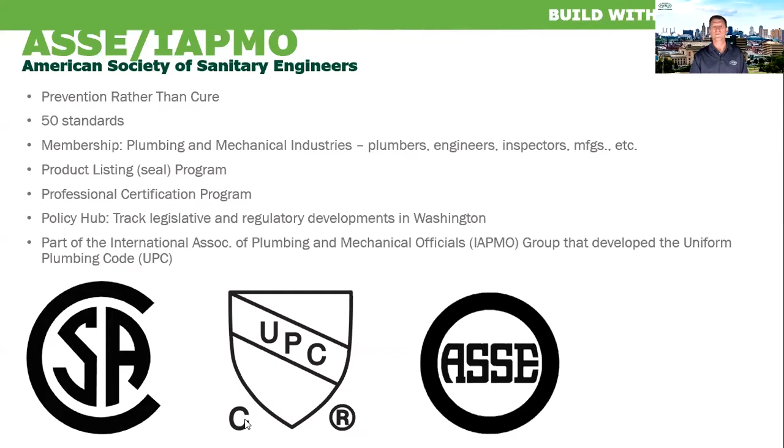Also on this slide, you can see the CSA logo. At Prier, we do not work directly with CSA. We could, but both IAPMO and ASSE have some avenues. If we want to sell into Canada, which we do, we just work through those organizations, and they can help us get the Canadian listing. They work with the CSA group. That's what the little C is next to the UPC shield there. That's not a copyright symbol. That little C means Canada. ASSE has a similar little C that they can put on their mark. At Prier, we've just chosen to work with the IAPMO group on the Canadian listing.

So here's the 4 main ASSE standards that we use here at Prier. The first 2, the 1011 and 1052, are for vacuum breakers. 1019, freezeless wall hydrants. And 1057 is your sanitary hydrant.

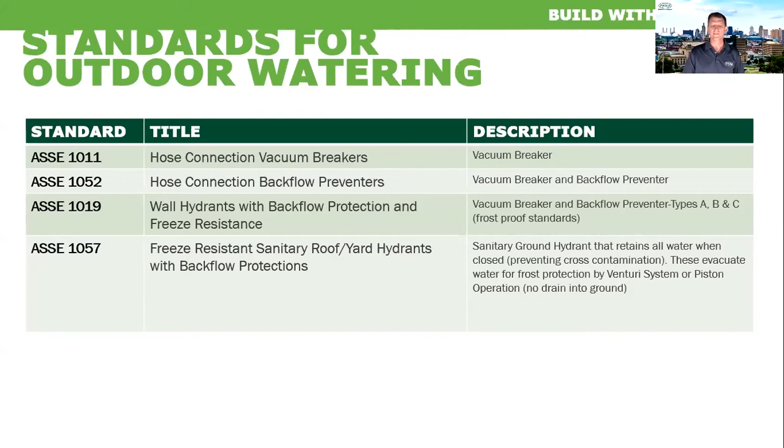Now, not all products are covered by ASSE. Particularly IAPMO, they don't have their own standards, so they use whatever standard they think is applicable to the product that you're trying to sell. A lot of people use the ASME. It's just a standard plumbing supply code, applies to probably hundreds of different types of products. You can pick and choose which parts of the test apply to the product that you're trying to get certified. And that's where we find the CSA standards that they use for selling into Canada. Other people are interested in some of the NSF standards, particularly the 61 and the 372, which we will talk about later on in the presentation.

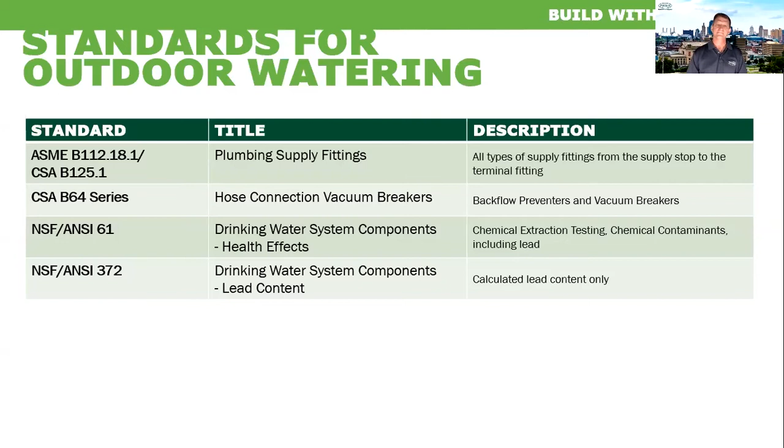All right, here's just your typical vacuum breaker. I'm sure you've all seen these before. Several manufacturers make products. They all look pretty much like this. The two on the left are 1011 type devices. The one on the right is a 1052. The numbers at the bottom are just Prier's model numbers, B002, 3, and 4. Now, every vacuum breaker has a backflow preventer in it, and it's a vacuum breaker, so it really has two levels of protection. The 1052 devices have a second check valve. You can see it here on the outlet. So it has two backflow preventers and a vacuum breaker, three levels of protection.

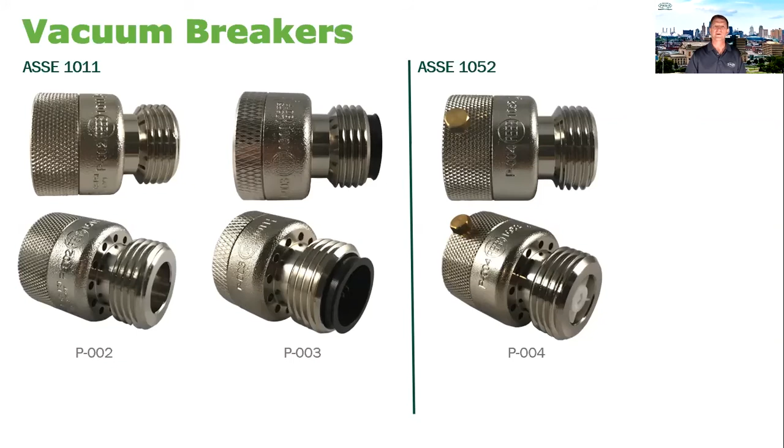And also a vacuum breaker, when it's sold separately like these are shown, has a little set screw in the side. Once you put the vacuum breaker on, tighten the set screw and break it off. That way we make sure nobody can play around with the vacuum breaker or remove it. So you can sell the vacuum breakers separately, or you can put them on other types of products.

So here's just your basic sillcock. It's been around for decades, probably designed before I was born, but still a popular item. They work great. The one on the far left does not have any backflow protection, but when you put a vacuum breaker on the sillcock, like the one in the middle and the far right, they become a code-approved device. So that's probably what you are looking at when you see a sillcock that has ASSE 1011 or 1052. This gives us an avenue for having protection on just the basic products.

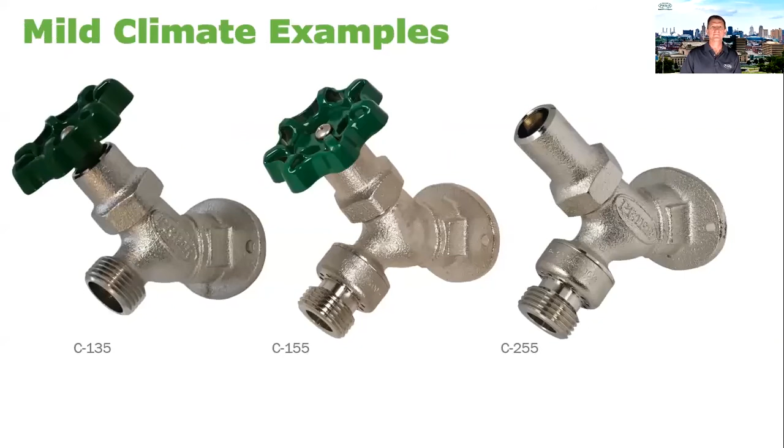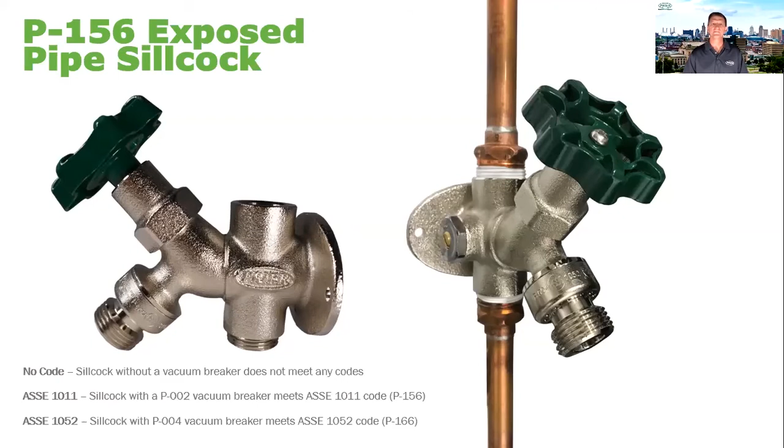Oh, here's a different type of sillcock. It's actually one of our newer ones where the inlets are on top and bottom instead of in the back, but same type of deal. You can put a vacuum breaker on there and it becomes a code-approved product. Now, we can't just throw a vacuum breaker on there and say it's code approved. We still go through the process with ASSE and IAPMO to make sure they have that model number listed, and we send them all the proper information to get it listed.

And 1019, now we're into the freezeless hydrants. Kind of like a sillcock, but they have the pipe extending into the building for frost protection, the nice warm environment. That's really the best way to get these products listed as a 1019 device, going through all the proper 1019 testing that we'll talk about in a minute. But you can actually just put a vacuum breaker on these devices, and it might be listed as a 1011 or 1052 type device. So that's probably confusing to you as engineers. You look at all these different ASSE standards and you see one thing on one product, another thing on another product, and you're not sure why it's listed like that.

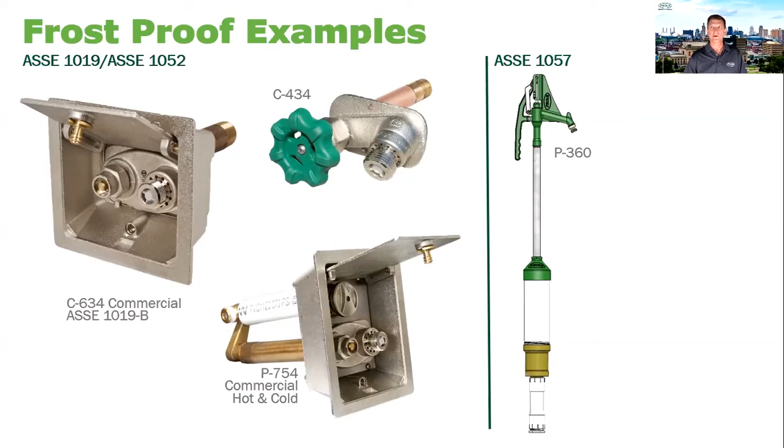Really, a lot of the testing is the same. It has to do with freeze protection in this case, but also backflow and vacuum breaker protection just to protect the water supply. And then far right, you can see a picture of a sanitary yard hydrant. Those need to meet ASSE 1057.

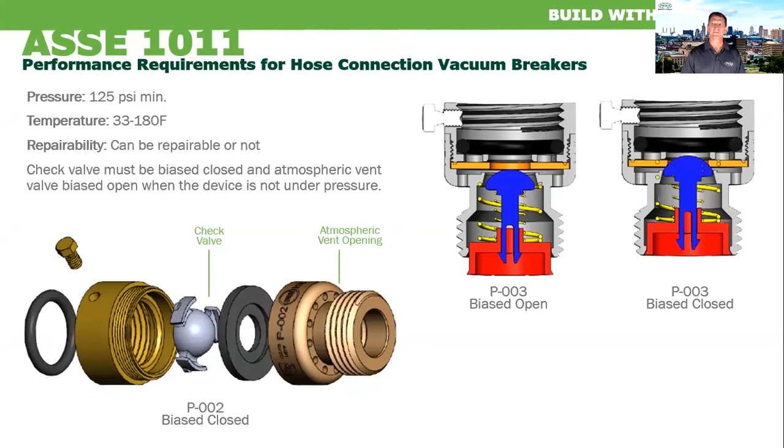It can also be a 1011 device and be biased open. So the one on the right, as you can see, has this plastic piece. Again, common, many manufacturers have this, so that when there's no hose attached, it's open. The check valve isn't really doing anything. So whatever you screw this onto, now it can drain. But once you put a hose on it, it engages the check valve. Product can't drain anymore, so you still have to take your hose off to make it drain, but at least now the check valve is engaged. So some people prefer that type of 1011 device.

So here's some of the tests that the product has to go through when we send it to the lab. I'm not going to go through all of these with you, but certainly if you have any questions, we can talk about it.

One question that a lot of people like to ask is, what is the flow rate? How much water can I get through your vacuum breaker? ASSE, pretty standard across all of their tests, likes to use 25 PSI as the pressure drop across the device. So in this case, you have to get at least 6 gallons a minute through it at 25 PSI. But if your building has more pressure, you're going to get more. If you have less, you're going to get less. It also depends on your ability to get volume of water too. It's not just pressure, it's making sure you get enough water to it.

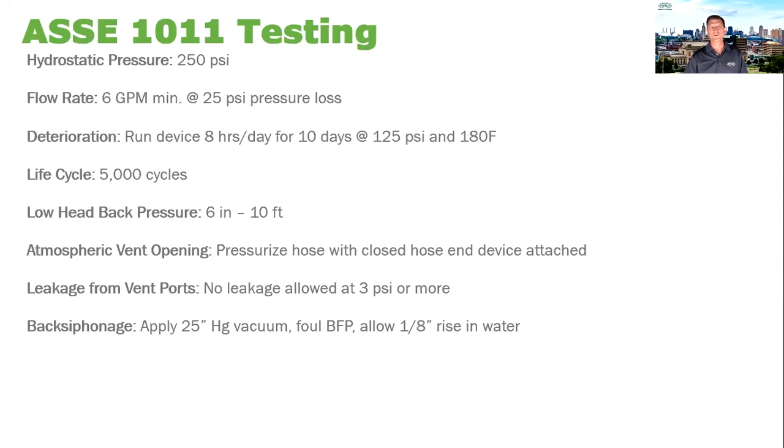Probably pretty good for that. If you have any questions, like I say, you can kind of see some of the tests that they go through.

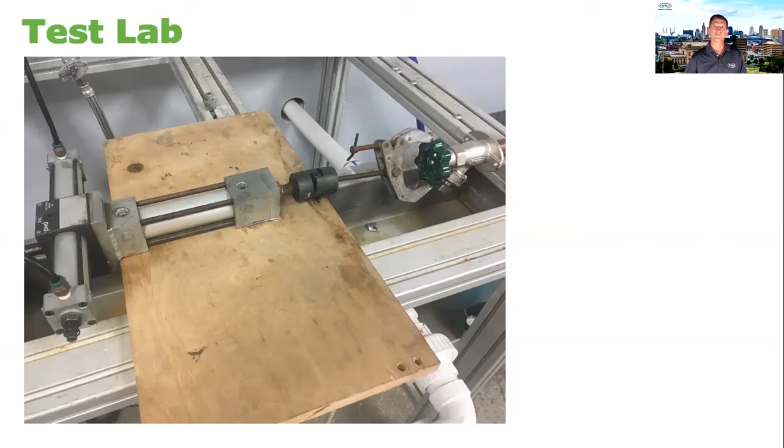Here's a picture of actually a cycle tester at QAI. That's the lab that we use. Like I mentioned, we can't just do our own tests and get it certified, we have to have an independent third party. So here you can see they have kind of a claw on a handle on one of our hydrants, and it has to go through 5,000 cycles under certain pressures, temperatures, allowable leakage, that type of stuff.

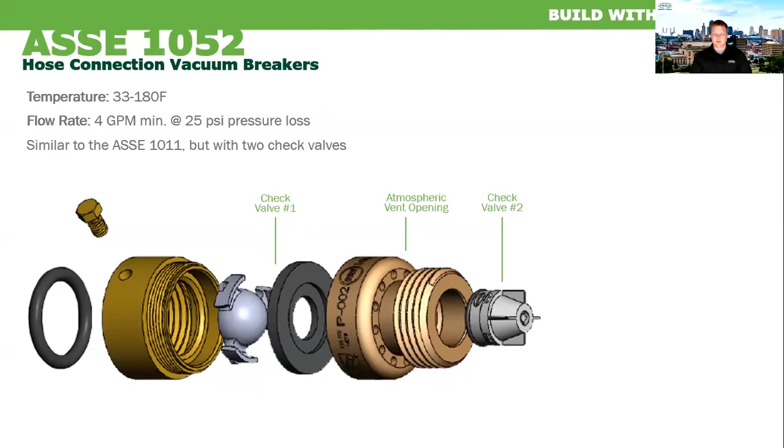Okay, so now it looks like, I guess most folks like 1052, but a close second is 1011. Pretty similar there. Now, so these are both the vacuum breaker hose end codes. 1019 and then 1057 comes in last. So let's continue on with the presentation here. Thank you guys for the poll. That was interesting.

Now, the 1011 and 1052 products go up to 180 degrees, which share a lot of the same components. So even though 1019 only requires up to 140, most of our devices can go up to 180.

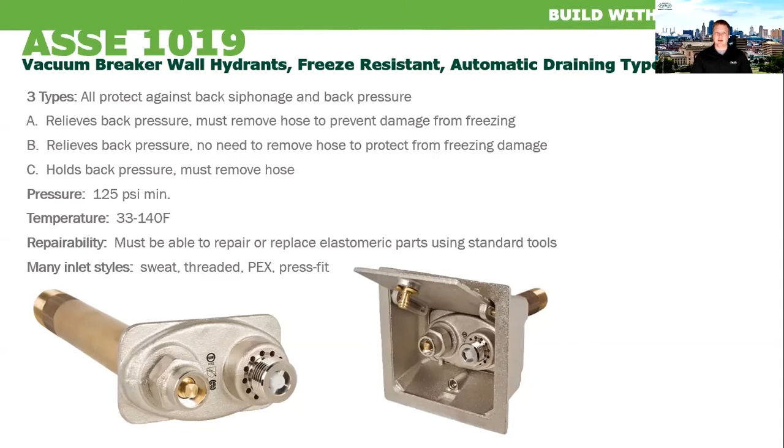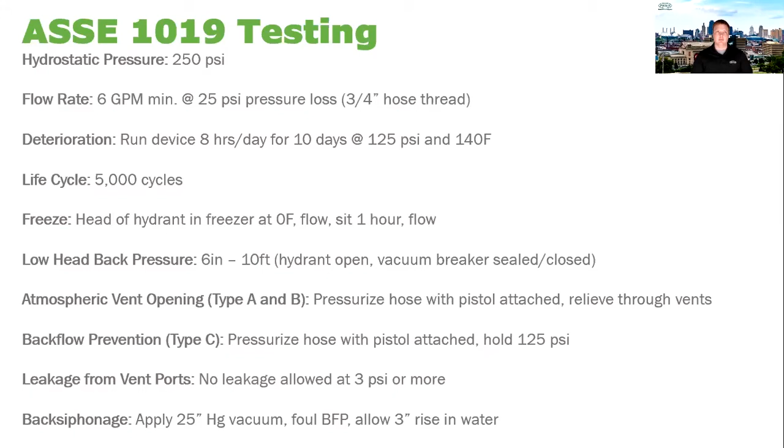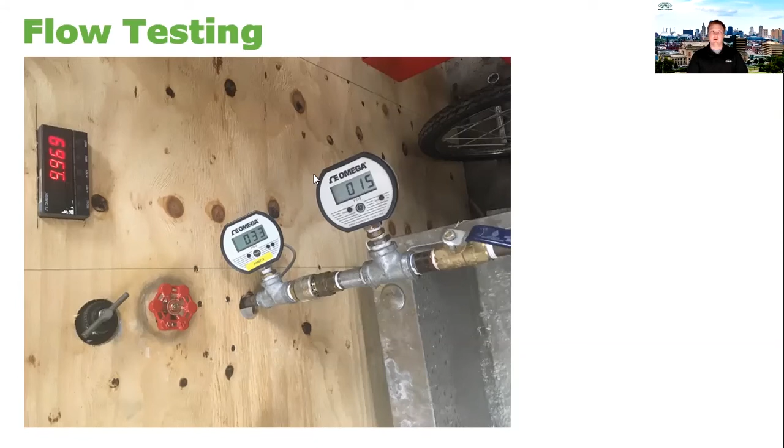So this here is measuring the pressure at the inlet of the device and at the outlet of the device to get a pressure differential, and then a flow rate is given.

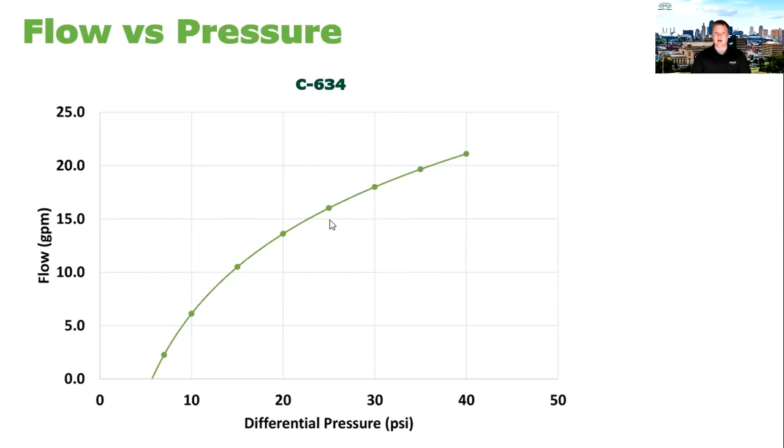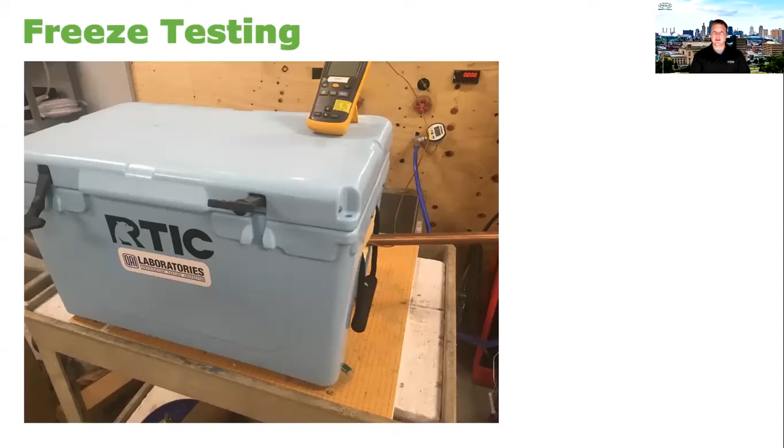So this is this product being freeze tested once again, and they do set these up pretty realistically. This is a device in a cold chamber, and the head of the hydrant is inside of the cold chamber with the freeze, while the body of it would be back into the warm section of the building, outside of the cooler. That's held at 0 degrees, and then after it sits for an hour, it must flow again.

So now moving on to 1057. If you have any more questions about 1019, just post a question there, and we can answer them here at the end. So 1057, away-from-wall hydrants, these are particular to sanitary yard or roof hydrants.

Similarly, they have different types, so these are types 1 through 5. Some can have 2 check valves, it can have 1 check valve. The tests stay pretty much the same, but they'll have specific nuances between the types that must be checked, depending on how the components are being used inside.

These hydrants are up to 100 PSI, so a little bit less than 1019, with a temperature of, once again, 140. Now, the same requirement applies that it has to be serviceable without excavating the hydrant.

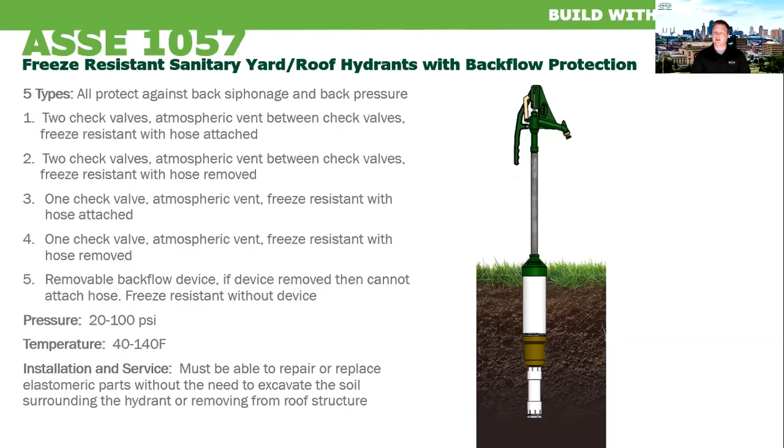For instance, on our ground hydrant here, this cap can be taken off. All the guts will pull out of the middle once again, and then you can replace any of the rubber or elastomeric parts underneath without excavating soil or removing it from the roof, or any of that kind of thing. So a little bit more into the physical tests.

Once again, they follow kind of the same main points that we're trying to cover. The flow rate here for a yard hydrant or a roof hydrant is a little less, at 4 gallons a minute. Now, the main difference here that separates 1057 is that it's called a sanitary yard hydrant.

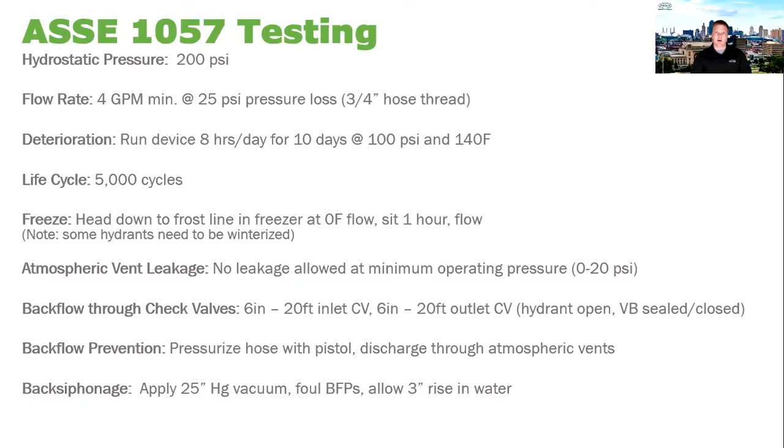That takes place here in the freeze test itself. So it's still the same setup, it has to maintain in a cold chamber at 0 degrees and then flow afterwards. But one of the main failure criteria of this is that it cannot drain below the ground line or below the roof line. All the drain water has to be contained within the hydrant itself.

So we'll talk just a little bit more about that here and what that means. So on the far left is our P260. That's a traditional ground or roof hydrant.

As it flows out the hydrant, and then whenever it's turned off, the drain water that's in the upright drains down and comes out a weep hole here at the bottom, and drains either underneath the ground, or if it's in a roof setting, that drain line has to be run to a drain somewhere, sometimes close, sometimes far away. Can cause some issues there.

Now these 260s, a traditional roof hydrant or a ground hydrant, it can still be code approved, but it'd be more like a 1052 or 1011 type of an approval.

Whereas a sanitary 1057 device would be like our PRH4. You can see here that it's set up to where it has this canister that's underneath, in the warm part of the structure or underneath the ground. So once again, it'll drain all of its water from the upright and come down and drain into this empty canister, so all that water is contained within the device itself. Then whenever the hydrant's turned back on, this piston comes down and purges all the water out of that canister back into the stem, and it's actually the first to leave the hydrant as well. So we like that about the device - the water that sits in the can, just hanging out there until the next time it's used, it's actually the first to leave the hydrant too.

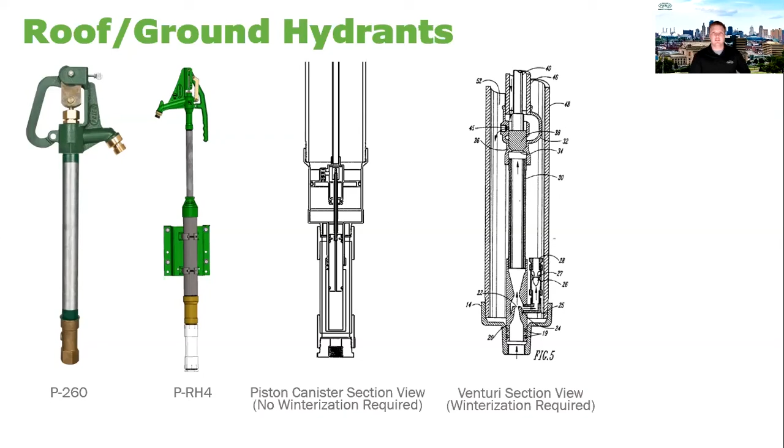Well, in that case, we have hydrants that work for both of those. The P260 would be one that you would go ahead and run a drain line from - it could still be approved with a 1052 or 1011 device. So both work there.

So just a real quick touch on roof hydrant mounting. Some manufacturers will mount with a mounting flange that mounts to the roof membrane or roof skin, so it can be mounted anywhere on the roof, but it's relying just on the roof itself, just the skin, to create enough rigidity to hold everything in place. It does take a few more penetrations through the roof to mount this as well - typically 4 bolts and then the main penetration for the hydrant.

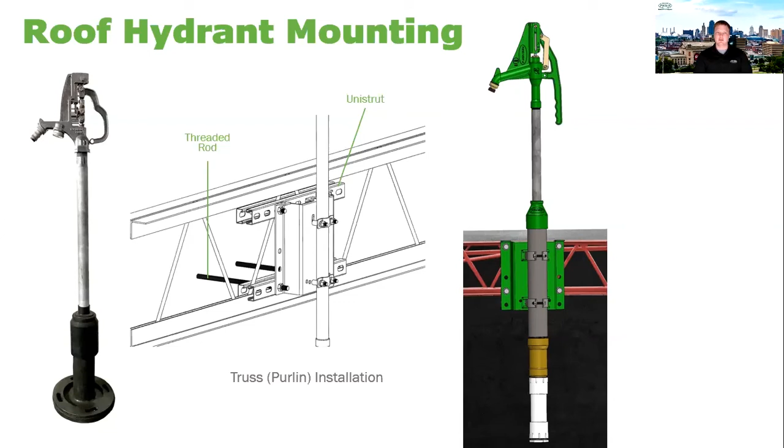Our mounting device here is actually rigidly mounted to the structure beneath the roof, so it's mounted really to the building itself, not just to the roof skin. Then through this mounting bracket we can mount the hydrant, and that makes for just a single penetration through the roof, so less leak points as well. Just wanted to touch on that quickly too.

So we've covered all the ASSE codes, but once you get the initial approval, it doesn't end there. ASSE continually checks up with their manufacturers to ensure that the products that were approved still can be approved and maintain their approval. So they send annual audits, and auditors come and inspect the plant. Our folks will take them on a tour. They'll talk with the production team. They like to talk with the quality team.

And then at the end, they'll take a few samples back to their labs and test a few of the actual ASSE tests, just to verify that the products that were once approved still have those same safety measures and flow rates and all that stuff. There is a cost associated with this. The initial cost is there whenever the product's first approved, and then there's a continual cost of around $12,000 a year to keep up to date with these codes. So just a little tidbit there.

Now, past ASSE, there's a few other codes. Scott mentioned ASME, some ANSI codes that they'll use for the threaded connections and that type of stuff. And past that, lead-free is another topic that our customers and engineers are concerned about. NSF 61 tests the contaminants in the device. So it's a physical test. The hydrants are filled with water, and this is just one sample of a test, but it sits for a while, and the water is then tested after to see how many contaminants are leached out of the device. This can be pretty expensive too, but does give good information and protects, in essence, our water supply.

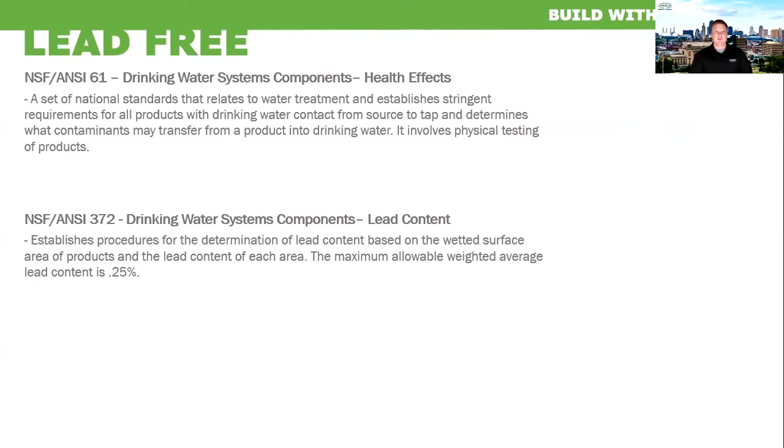So, well, thank you guys for your time today, and I'll turn it back over to Scott. Thank you, John. Good job.